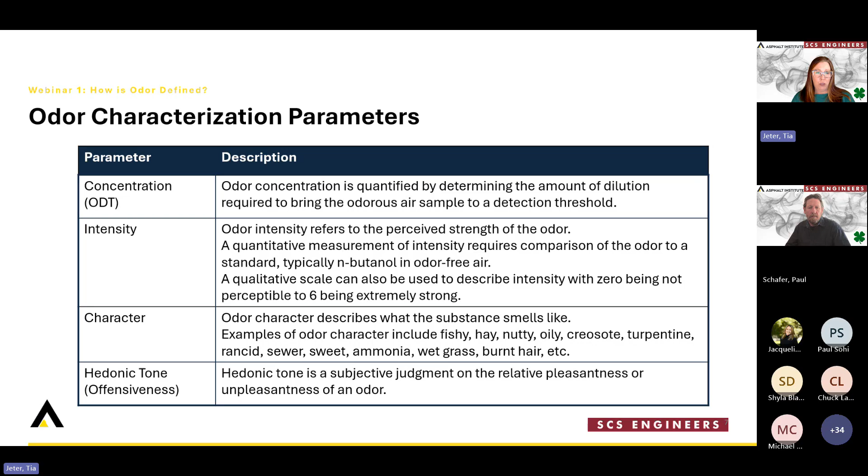Intensity refers to the perceived strength of the odor, another way to characterize it. The character is a definition of what does it actually smell like? Does it smell sweet? Does it smell fishy, nutty? There are ways to describe an odor, and that is considered the odor character. And then the hedonic tone is the perceived pleasantness or unpleasantness of an odor. So those are the characteristics we use to try to define what odor is.

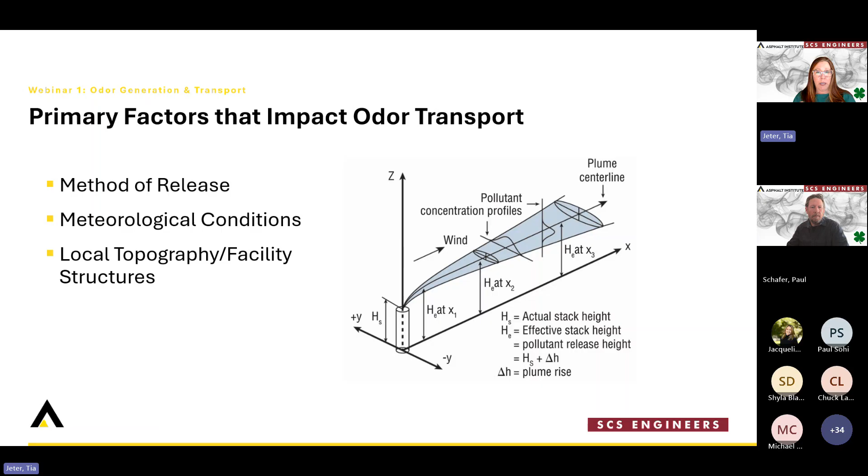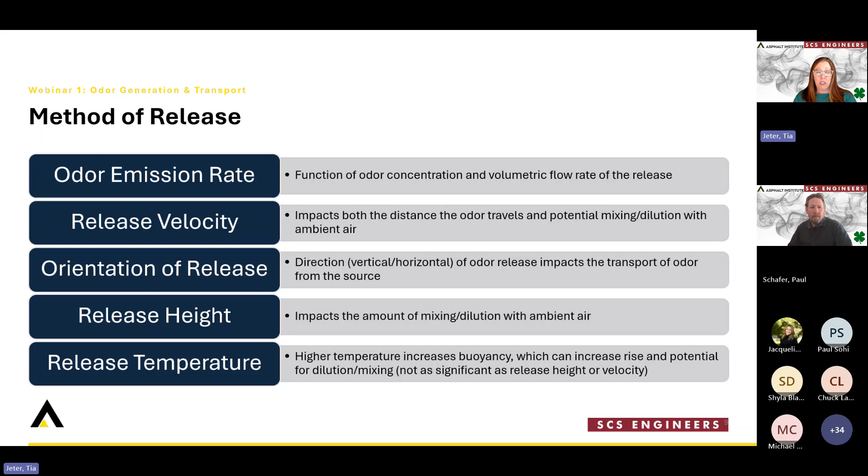The primary factors that impact odor transport are the method of release of the odor from your facility, the meteorological conditions at the time of the release, and the local topography and facility structures, which can impact how the odor will move. A little more detail on that method of release. These are the parameters for the odor emission rate of a particular source, a function of the concentration of the source and the volumetric flow rate of the release. The release velocity, which can impact the mixing and dilution of the odor in the ambient air, the orientation of the release, whether vertical or horizontal, the release height, and the release temperature. These all impact how it will transport from a facility.

So that was a real quick recap of what we touched on in webinar 1. The next section is our odor monitoring options, and I'm going to hand that off to Paul to discuss.

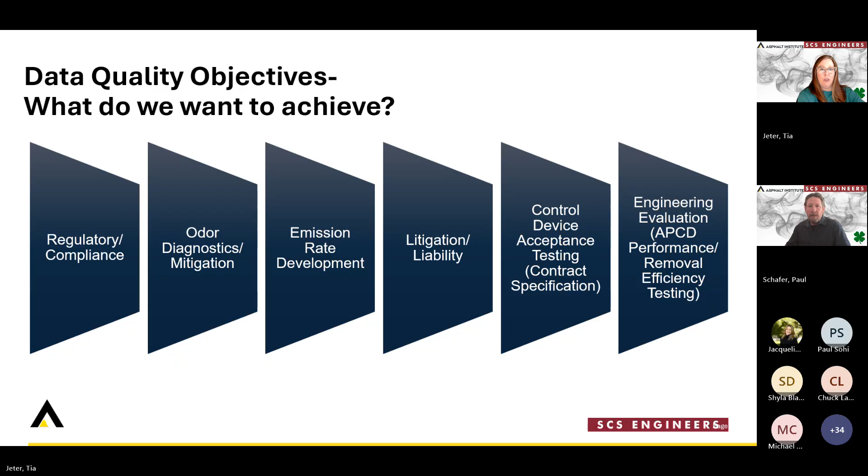So methods to assess odor concentration. There's a few ways we can do it, either through odor analysis, and we'll go into much greater detail on what that looks like later throughout this section, using odor panels, and that's where you collect a sample and send it to a lab for analysis, or field olfactometry measurements, i.e. using a Nasal Ranger or an SS100 type of field olfactometer. That's for direct measurement of dilution to threshold concentration of odor, just using the human nose.

Or there's other ways: you can measure specific compounds if you are trying to figure out what odorants, what compounds are driving your odor situation at your facility. Measurement of specific compounds may be necessary. There's all sorts of types, from volatile organic compounds, different types of ammonias, amines, sulfur compounds. Sulfur compounds tend to have very low odor detection thresholds.

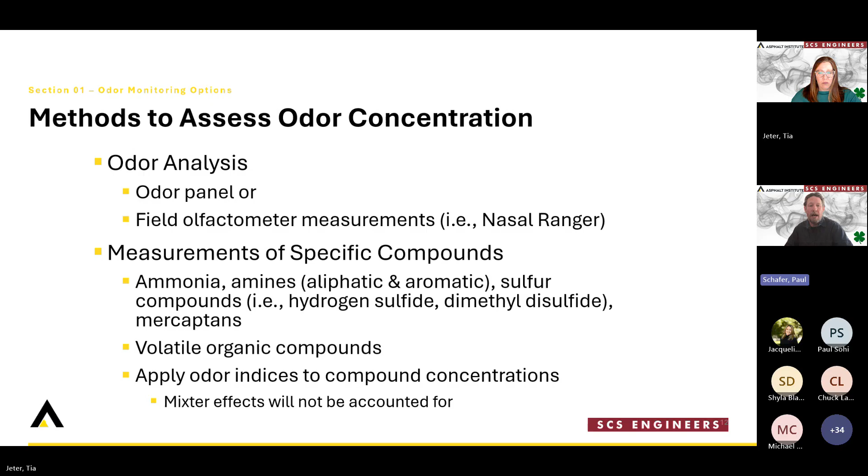And then when you're doing this, once you have the measurements made, you need to understand what odorant is related to that specific compound. Like Tia said, hydrogen sulfide has a very low odor detection threshold specific to that compound, but some compounds could have multiple orders of magnitude higher odor detection thresholds and might not be a main odorant, even though they're a high percentage of the composition of your odor samples.

So again, just more ways to gather measurements. For on-site odor measurement, field olfactometry is a great way of assessing. Nothing beats the human nose as far as the perception of odor. There's a thing called an electronic nose, and we'll talk a little bit more about that. There's certainly some limitations to the use of it. Real-time sensors, so the measurement of a compound that you know may be a significant odorant at your facility, real-time measurement of that as a surrogate for your odor concentration.

You may want to collect samples, and this all depends on the end use of your data, right? The type of data gathering measurements you're going to be using. For sample collection, you can use flux chambers. Those help you determine the flux of an odor through a specific surface area and are great for area sources. Direct probes, direct measurement, collecting lung samplers or Method 18 samples, which allow you to collect a sample without your sampling equipment coming in contact with the sample itself. Time average sampling, long-term time average sampling to get longer averaged measurements, might be necessary to meet detection threshold limitations.

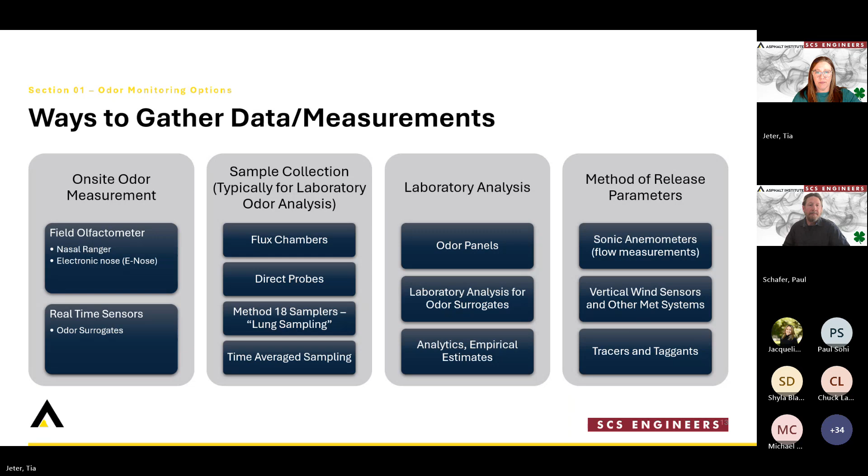So just some examples of field sampling methods. The ones listed here are kind of screening type methods for initial surveys. We have a Jerome sampler that is used for hydrogen sulfide sampling. It's capable of measurements down to the 3 parts per billion level, so just at the odor detection threshold or below it for most people. Field olfactometry using a Nasal Ranger. It's a system for determining dilution to threshold ratios using the human nose to develop an empirical measurement of human perception.

Other ways of on-site sampling: potentially colorimetric tubes to get just an idea of a range of a concentration potentially coming through a stack, other types of handheld meters, a Jerome, potentially a total VOC or PID meter to determine total VOC concentrations. And then essentially where you're collecting samples, often you need to know the air velocity at the time, because it's a significant variable in regards to odor concentration.

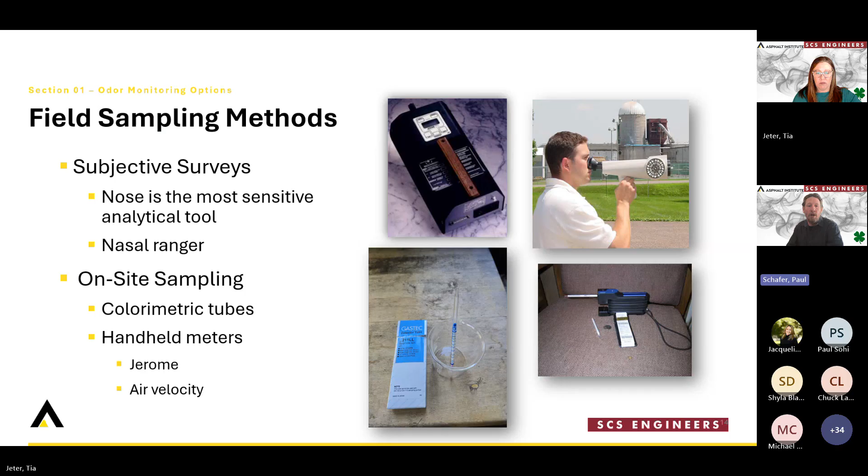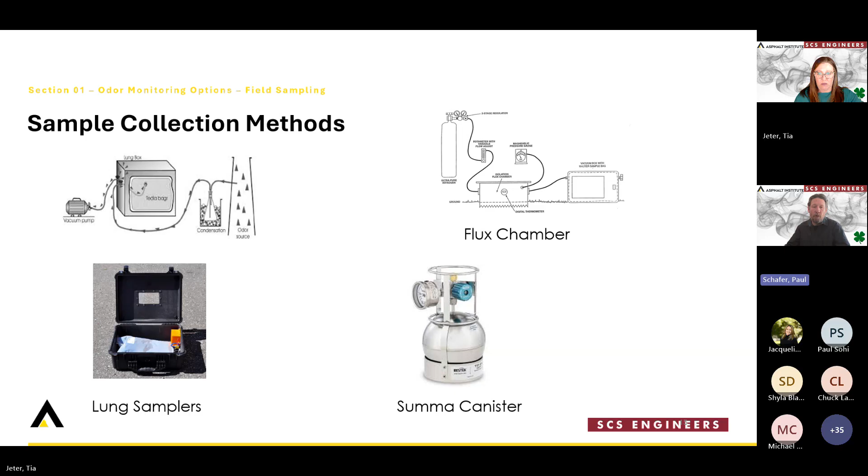Summa canister: it's a great method for collecting either time average samples with a critical orifice and flow controller, or you can collect grab samples with the Summa canister. It's considered a whole air sample because you can collect that sample and do multiple types of analysis on it, either for volatile organic compounds and a long list of those, or potentially a list of sulfur compounds. So multiple types of analytics can be performed off a single Summa canister, making it a really efficient way of collecting samples, either grab samples for instantaneous concentrations or time average samples.

It's just an example of a field deployment where lung samples are collected for subsequent analysis, either from stacks, process equipment, passive sources. When you're collecting these types of measurements, it's critical to also take velocity measurements or flow measurements so that you understand the volumetric flow of the specific source.

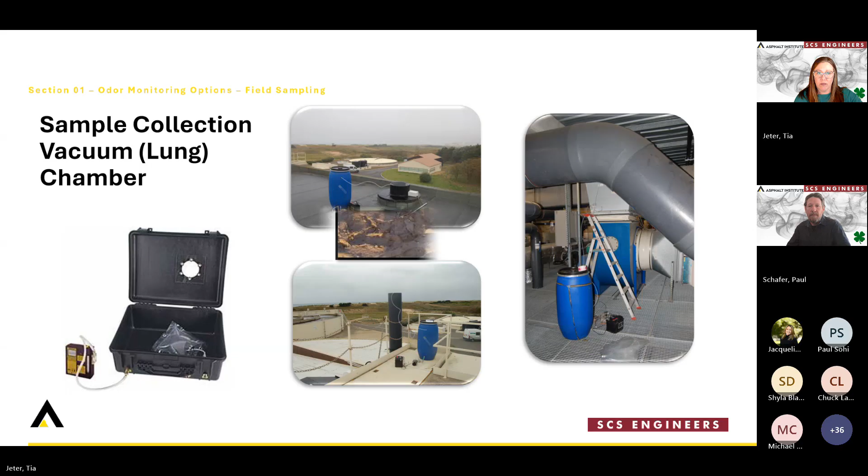Here's some examples of some dynamic flux chamber methods. Like I said, from collecting from area sources, you could actually collect them from liquid sources, as well as ground surface area or bulk storage areas. Sweep gas is used to facilitate the ability to calculate a flux of odor, a flux of a compound, as a function of the surface area that the flux chamber is situated over.

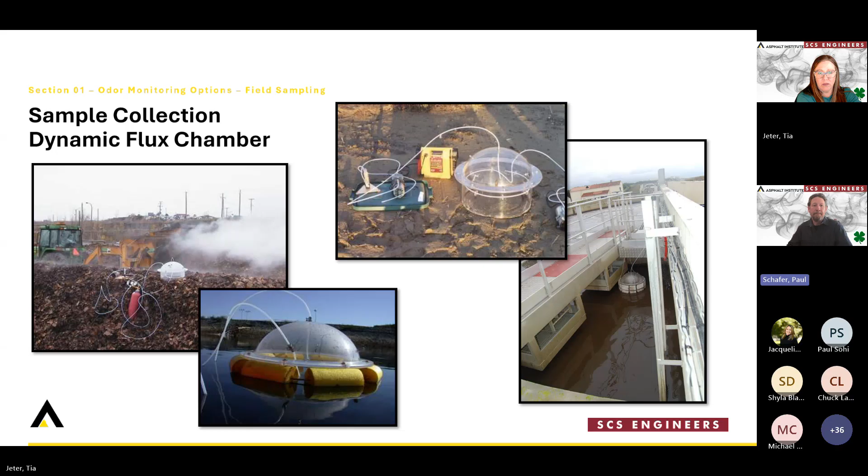So on-site measurements using Nasal Ranger. So this is based on the same principle of dilutions to threshold ratio, based on dilutions of sample required for the sniffer to detect odors. Generally, there's a wheel on there and you have preset dilutions you can set it to. For the Nasal Ranger, I believe it's 2, 4, 7, 15, and then it increases from there. Essentially, the larger number, the higher the dilution to threshold.

So background odors are generally between 2 and 7 D/T on a Nasal Ranger, and then you can get higher ranges for that, 30, 45. That's a very high concentration for an ambient measurement using the Nasal Ranger.

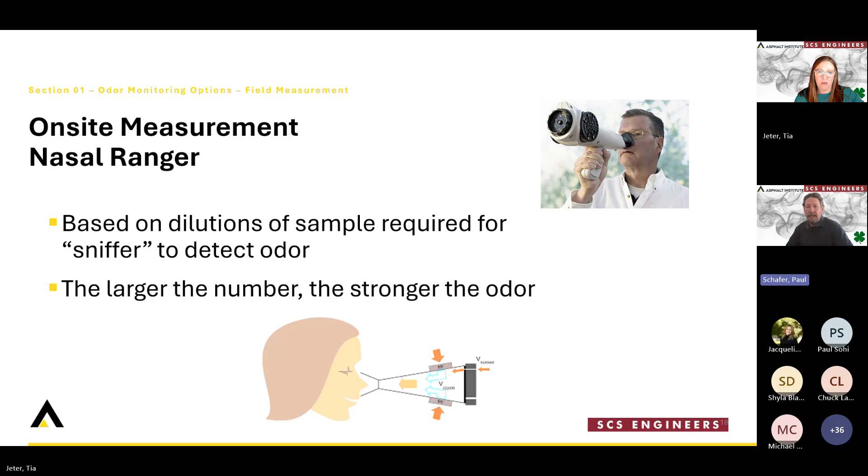So on-site measurement. So just briefly talk about electronic e-noses. I don't like the term e-noses because it tends to draw a strong correlation between a set of metal oxide sensors or electrochemical sensors that measure specific chemicals and an odor concentration. However, in most cases, odors are so complex. There's mixture effects. There's all sorts of things that go on. And after 25 years on the market and multiple different tools being developed, e-noses are still not very well correlated with human noses in most instances.

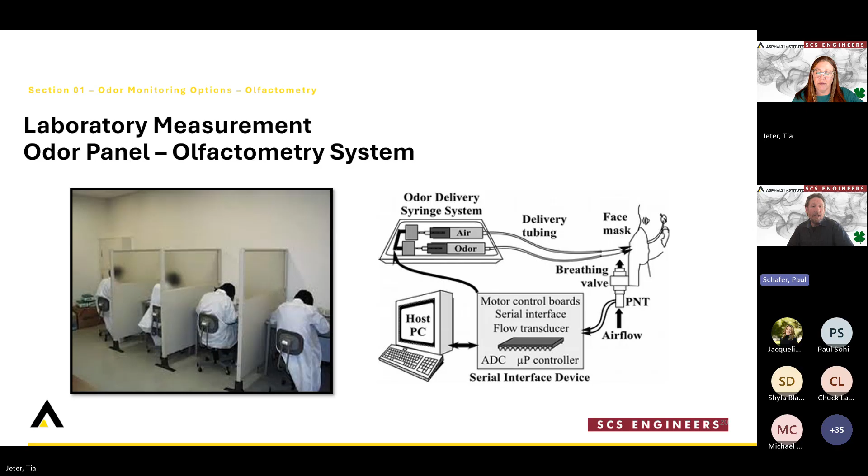So this is just a quick example of laboratory measurements using an odor panel. What happens here is you collect the sample in the field. The sample has to be delivered within 36 hours, and we'll discuss that a little bit more in a later section, and then it's analyzed at a lab. And the way this is done is you have certified sniffers. So you have people who have gone through screening to make sure that they are in the average range of smelling. You don't want what we call super sniffers, or people who are not able to detect compounds like the regular population. So there's a screening method that goes in there.

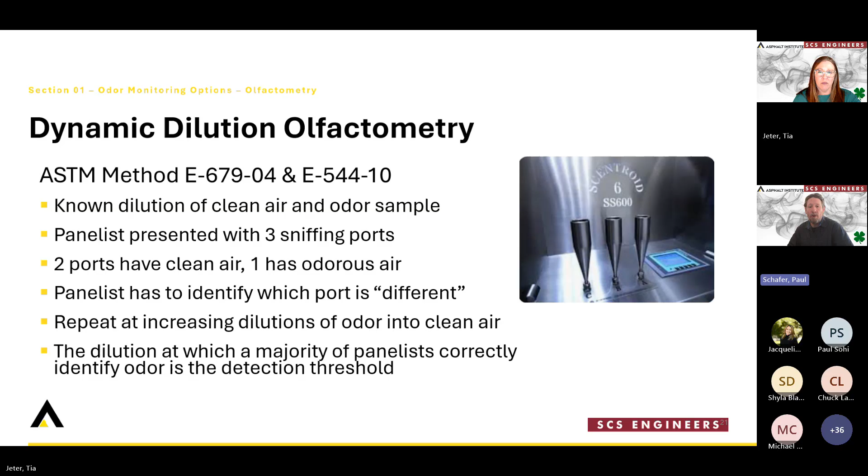So there's multiple panelists on it. Known dilution of clean air is provided to the 3 ports, with one of the ports having a diluted amount of the sample air. So 2 ports have clean, and one has odorous air at a dilution ratio. Panelists have to identify which port is different, and say, okay, port 2 has the odor, and you repeat this at increasing dilutions until a majority of the panelists correctly identify the odor from the specific nozzle. And essentially, the higher the odor detection threshold, or dilution to threshold concentration or odor units per meter cubed provided by the lab, the stinkier the sample is.

So why is olfactometry important? It helps the industry identify and assess the relative concentration of odors associated with its operations. Again, it provides empirical data to describe a human perception. And using multiple odor panelists, it's incredible how well this normalizes and works to rank odor sources and identify the odor strength of a source. It may be used for compliance. ASTM standards provide guidance for accurate and standardized odor assessment, so it's repeatable, and it could even be written into a regulatory requirement.

ASTM E679-04 is a standard practice for determining odor and taste thresholds using a forced choice ascending concentration series method, and it's the method that most odor labs utilize. There's also a European method utilized by some labs. So we just discussed a little bit about the importance of olfactometry, what it can do for you. There are some significant challenges to olfactometry, especially using odor panels.

The holding time. They have to be analyzed within 36 hours from sample collection to analysis. So that means you have to have the odor lab generally reserved ahead of time prior to collecting samples. You can't have an odor event, collect a sample, send it to the lab, and expect them to be ready to analyze it. It has to be forecasted and reserved with the odor lab.

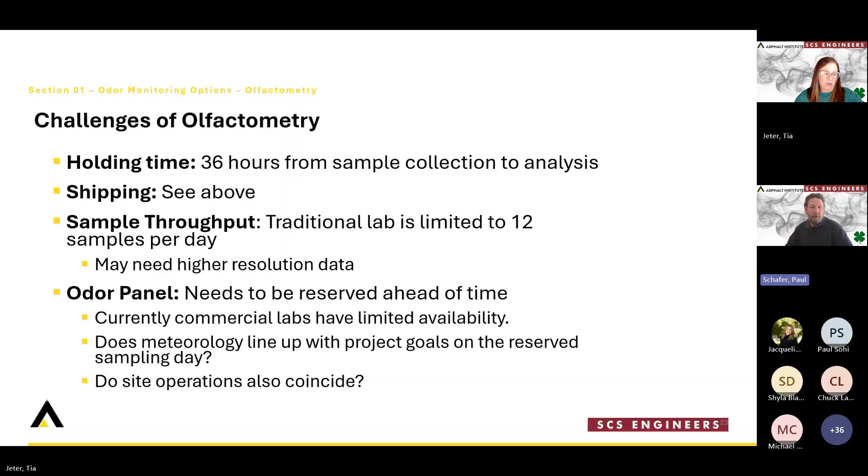All right. So now that Paul went through how you collect a sample, I'm going to do just a quick overview on how to complete an odor assessment. When you start an odor assessment, what we suggest initially is to define your program goals and design features. Some of these are listed out here. You want to ask yourself, what is the end use of this data? What is the point of it? Is this for a regulatory issue, or is this just a proactive site wanting to get a sense of where you are today? So understanding what that is.

Looking at the odor causing processes and ensuring collection of representative samples. You don't want to take a sample during a malfunction or an abnormal operation and base your assessment on that, unless that's the case you're wanting to define. Understanding the air matrix or process stream composition you may encounter, and from that you may be able to select some target parameters, and also be mindful of potential interferences because of those compounds being together. You also want to look at precision and accuracy goals, including detection limit requirements. This may require collection of a sample over a longer period so your detection limits are met.

From all of this, you can identify the methods that will fit based upon those parameters, and then see how all this affects your budget and resources. Do you have enough budget to do the full scale of an assessment? And if not, where do you need to pull back on your approach? And then also considering your stakeholder expectations and what they want out of your program.

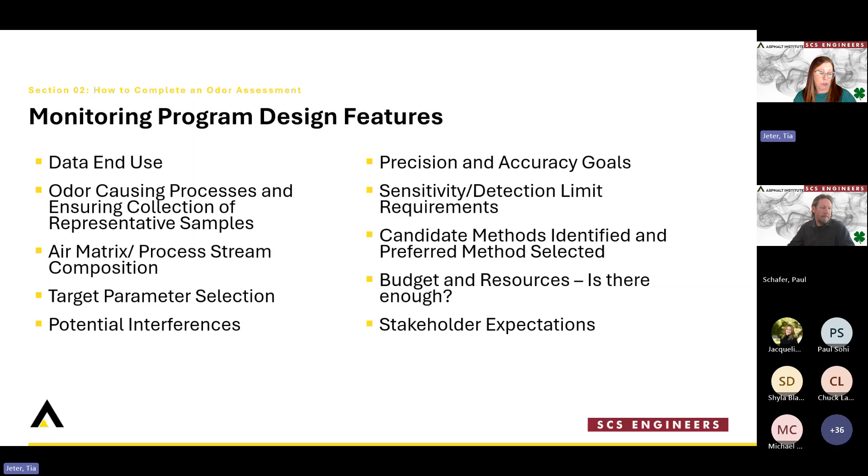Something we also suggest is preparing a roadmap at the beginning of this process, once you go through that planning for your monitoring program. This will document your program elements for all stakeholders involved. This is really valuable, especially if you have community involvement in an odor issue where they want to feel like they are part of the process. It just helps with that community involvement. We also see this required, especially when these studies are done because of a regulatory compliance issue or litigation.

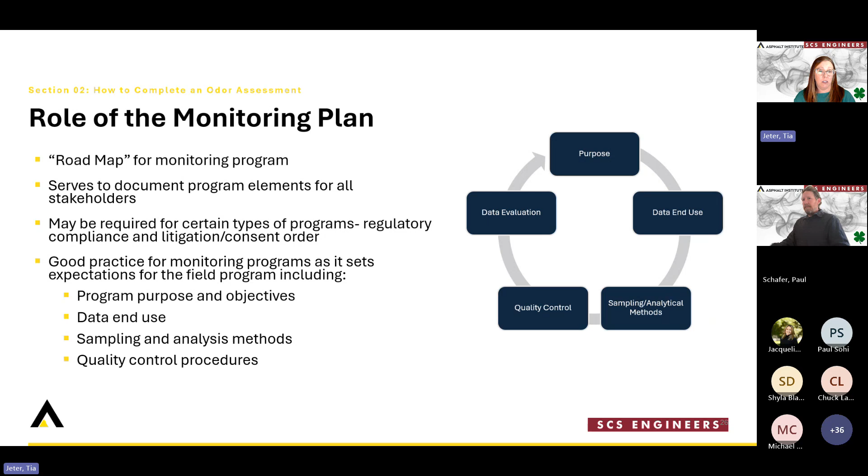Coming up with a monitoring plan is very beneficial. It'll help set the expectations for your field program. In these plans, you will set out the purpose and objectives of your assessment, the data end use, sampling and analysis methods, and then your quality control procedures.

So the volume of your release, your volumetric flow rate, your stack parameters, temperature, release height, all that good stuff. And then from that, you build an odor emissions profile. That information is used with some meteorology. So if you're lucky enough to have your own met station on site, that's fantastic. We can use that data. If not, you can get meteorology from a local weather station. A lot of times these will be at airports close to facilities where we could find that data.

And from that, we will use a dispersion model to estimate downwind odor impacts from your facility. And then that model can be used to come up with mitigation strategies. So you can model different scenarios to see what kind of options you have to reduce odor.

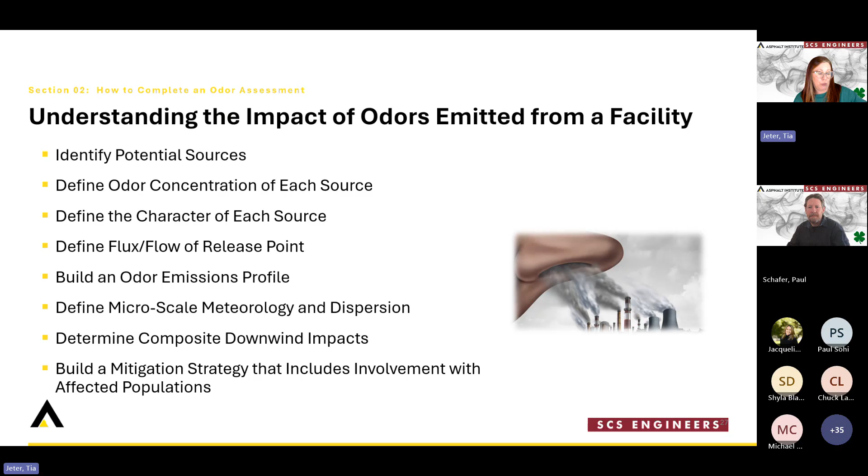So to build your odor source profile, by source, the first thing you're going to do is define the odor concentration. That's that D over T. So this is typically where you're going to go out, collect a sample, send it off to an odor lab and get that olfactometry analysis done to get your odor concentration. The odor lab will also typically give you the character of the source. So they'll define the odor, whether it's fishy, salty, sweet. You'll get that as part of that lab analysis.

That can be used to help determine, if you're having offsite odor issues, whether what people are observing downwind is consistent with the character defined by the lab. You also need to measure the source's volume flow. So those release parameters need to be collected as part of building this odor source profile. Something else we want to look at is the operation of that source. Is this a source that runs 24 hours a day? Or is it an intermittent source?

Like if you're unloading asphalt trucks, you're probably going to get a peak amount of odor for maybe 15 minutes or so when they're unloading that truck until the next truck comes through. So it may not be a continuous source, and we need to understand how that works, as well as any other operational scenarios. You could have a facility that changes the product line. So do odors change by product line you're making? You need to catch all of those potential scenarios so you model a full odor profile from your source.

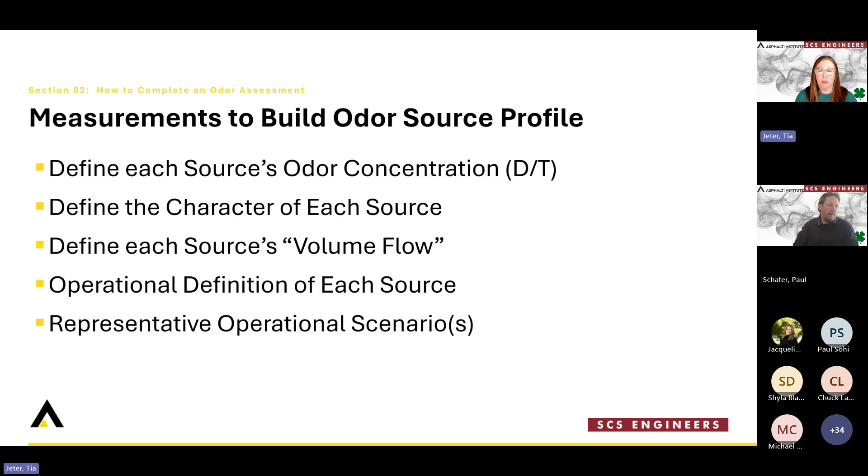With that, we can model your source. So the model inputs that we use in a dispersion model are the odor profiles for each source. So you have your concentration and all your release parameters. Facility structures are added, surrounding topography, and then local meteorological data. All of that goes into a dispersion model. And the model will predict ground level odor impacts surrounding your facility.

Typically, we do this with AERMOD. AERMOD is an EPA accepted dispersion model, which is frequently used for modeling of other criteria air pollutants for air permit purposes, but it also can do odor dispersion modeling. And with this AERMOD model, you can model many different scenarios to see how it impacts the expected downwind odor from your facility.

Like I said, with the model, you model different scenarios, and from that you can develop a mitigation strategy. So some of the strategies we've seen facilities make is just a change to facility operations. Time of day impacts can be useful, in that downwind odor is a lot of times stronger when you have a stable atmosphere.

A lot of times that happens in the early morning hours due to changes in temperature from nighttime to morning time. That's when it's very stable. There's low wind, low mixing. So you may have stronger odors occur in those morning hours.

So an option is, can we maybe avoid doing odorous activities those times of day and wait to do them later on in the day when we have more potential for mixing and dilution of odors? So those are just easy operational changes.

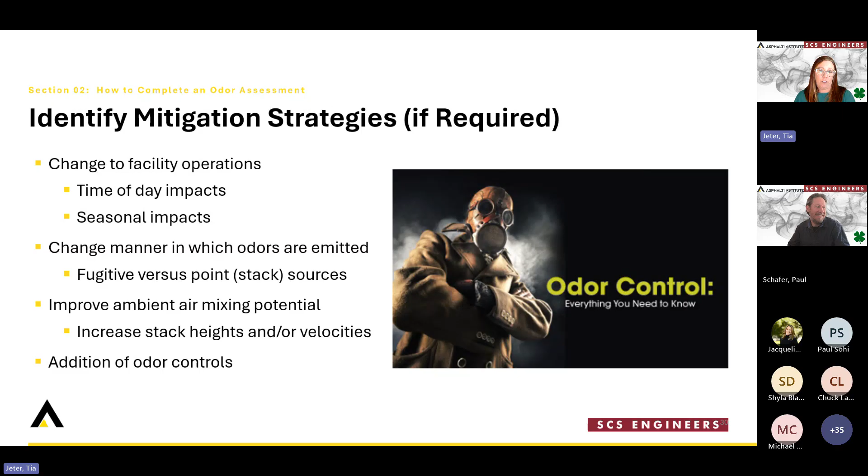Other ways that we've looked at to improve mixing would be increased stack heights or velocities. And then the last hierarchy would be to add those odor controls. That would probably be the most expensive option. So we start from the easy facility changes and then look at odor control towards the end. All of these are scenarios you can put in a model and see what that looks like to help a facility identify, from a suite of options, which one works best for them.

Some key understandings and mistakes to think about when you're doing these odor assessments: planning is one. Plan ahead and understand your limitations and constraints of your study. Make sure we're keeping in mind those operational considerations. So operating schedules, loading and unloading times, seasonal variations, those are all things that need to be defined and understood in your plan.

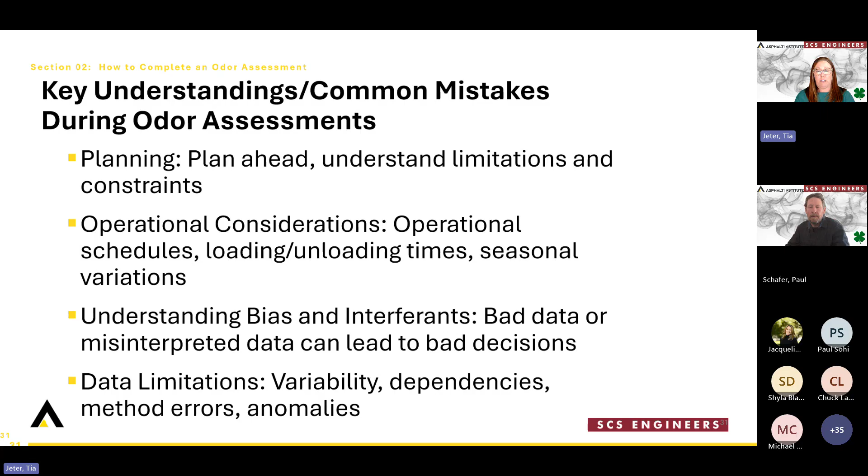Also understanding the potential for bias or interferants. Bad data in can be bad decisions out. So you want to make sure that the data you're looking at is appropriate and there isn't any potential for misinterpretation. And then also just data limitations. If there's variability in data, dependencies that aren't considered, method errors in your analytics, those are things that again can lead to that bad data. So just think about that as you're going through your odor assessment and make sure you're understanding all those risks.

So that was a very quick discussion on how to do an odor assessment. This next section, we're just going to go over a couple case studies on odor assessments that we've done to give you a flavor of what those have looked like.

This first case study, this was actually some odor work we did for an asphalt shingle manufacturing facility. This was a proactive decision by this facility just to gauge where their current state was and if there was any room for improvement on potential odor reduction at the facility. So we did build an odor profile for the plant. We started this from the desktop assessment of identifying all those potential sources. From that initial assessment, we decided these are the biggest bang for our buck. We're going to go ahead and collect samples from those sources.

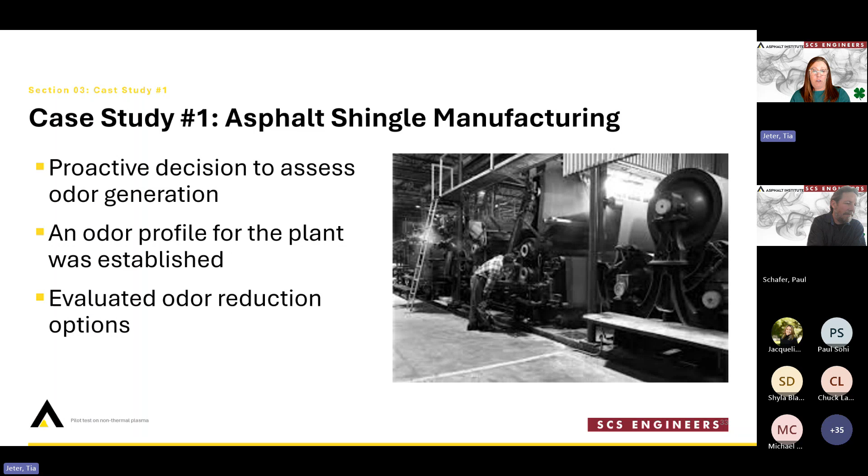While we were on site, we did measurements for all those release parameters for those sources. So we did all the stack information. We did measurements of fugitive sources. That way we could take all that data, put it into a model of the plant, and then from that help them identify potential odor reduction options that they could pick from.

So it shows you that in certain circumstances, you could have an odor source with a very high concentration, but if the volumetric flow rate is low, your odor flux, or the mass, if you were to try to convert it from a concentration to a mass of odor leaving your facility, is low, which is why it's important when you're trying to build your odor assessment, you look at both. It's not just concentration. You have to understand how it's released and at what volume it's released from your facility.

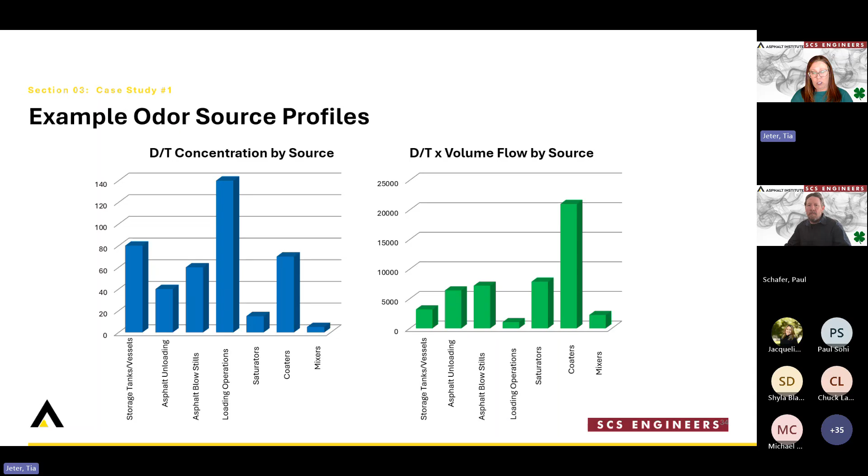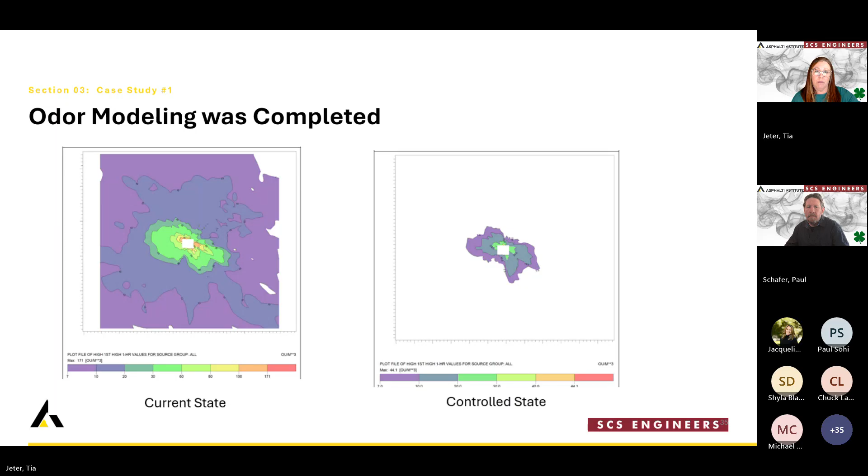In general, with the odor mitigation plan that was developed as part of the testing on site, we were also looking to see if there was an odor surrogate we could use moving forward, so that we could just sample for one parameter in lieu of doing a full odor panel, to help avoid some of the issues with olfactometry. With that, we did analysis for total sulfur in conjunction with collecting odor samples to see if there was a relationship.

So in this case, for the facility, increasing some stack heights can be a slight initial capital, but it's not super expensive. That can make really good improvements to odor. And then they are also going to be potentially installing some odor control just to see what impact they get from that.

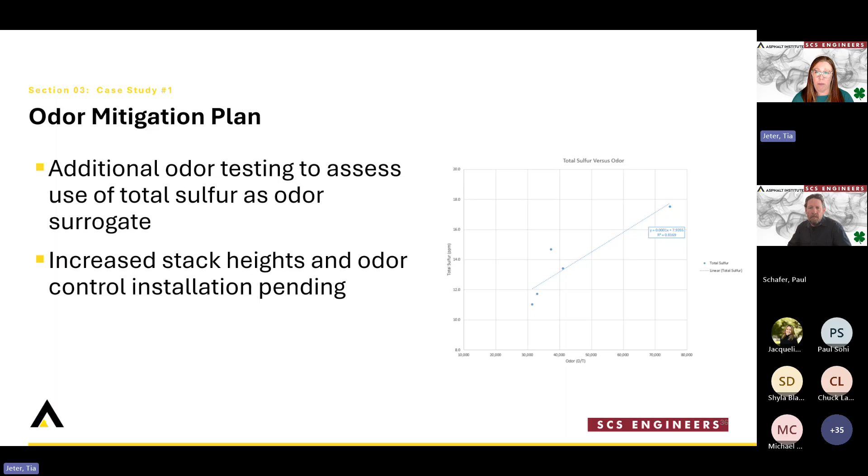This next case study is one that Paul worked on, so I will hand it back over to him. Thank you, Tia. Appreciate it.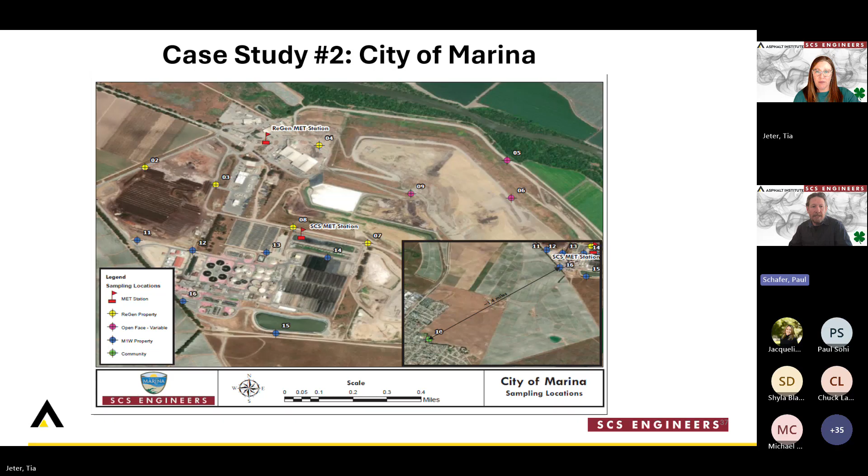There's also an active landfill with an open face, a construction and demolition debris processing area, a gas to energy plant, so all sorts of different sources in one area. So the way we structured this project is to try to bracket each of these sources and subsources with a collection of a sample, upwind and downwind, from a specific source or subsource. So if you move on to the next slides, we had samples that were collected on site, samples collected off site, and roving samples.

One thing about this project, and I think it's important, is that because this project was so complicated, each of the sources believed that the other source was the cause of the downwind impacts, and there was a lot of finger pointing going in opposite directions. There were a lot of people involved, from the community, the city, the specific sources being assessed, and then SCS, who conducted the measurements and performed the assessment. And we got feedback from each of these groups prior to moving through the project to make sure that the data we attained met the project goals.

So for the project plan, task 1 was the initial review of information. We wanted to review complaint data and meteorological data associated with that complaint data, seasonal wind variations according to the meteorological analysis, report those findings, and then we updated the overall project plan based on the available information we had at the time. We determined that there were specific seasons and times of day that were conducive to odor impacts into the communities. So we decided to design our monitoring project around those same meteorological conditions.

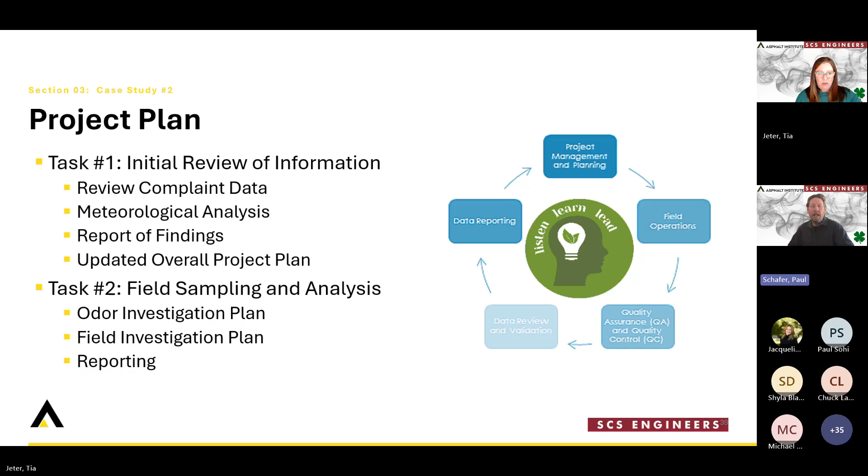So in our MET complaint data review, there were 60 MET stations in the region, but we've determined that only 3 were viable due to either data quality, the averaging times attained by that meteorological system, a lack of historical data being stored, the temporal resolution of that data. Like I said, its averaging periods weren't conducive, and what proximity they were to the city. In a highly topographic area, you need to have fairly close meteorological data to better describe the situation at your location.

ReGen is one of the odor sources, the landfill, and they had an on-site meteorological station, which ended up being perfect for the study, and another nearby station that we used to confirm the ReGen data was similar and representative. We've determined that easterly winds were prominent during the morning, but taper off in the afternoon. And those morning hours were what moved odors toward the city from east to west. The majority of complaints occurred during the winter months and during the morning and afternoon hours, with morning being the most prominent. Thus, we utilized those periods for collecting our field sampling.

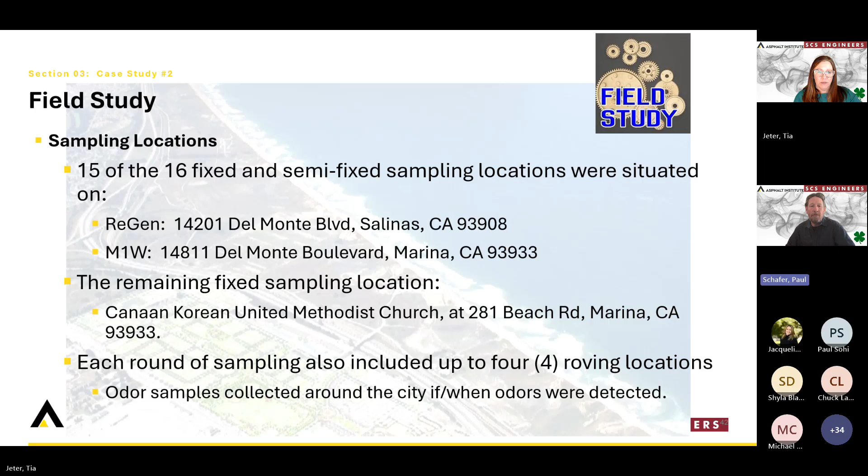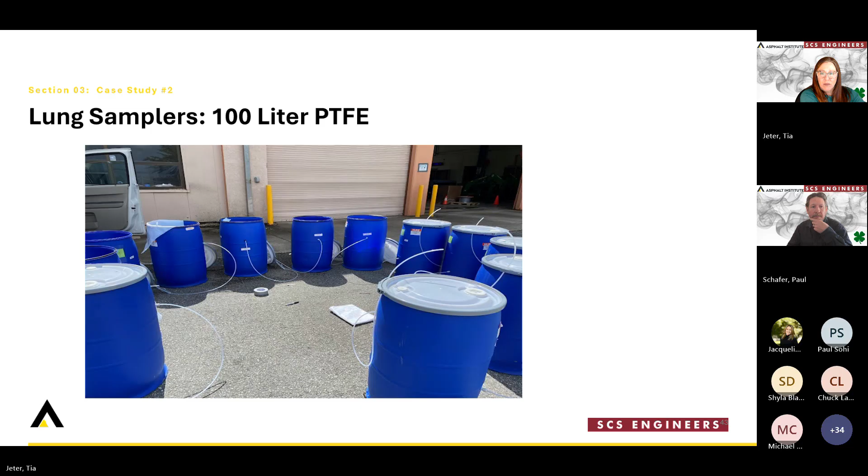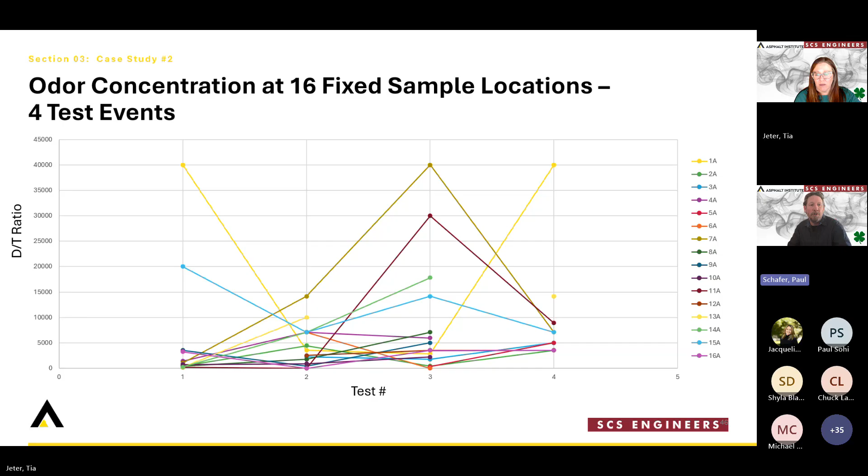And just so you know, we had 4 test events. The results of the 4 test events, the tests are on the bottom, show the relative concentration of odor specific to the 16 different fixed monitoring locations. We also incorporated our roving monitoring locations into the analysis. And it generated some pretty quality data that we were able to glean some conclusions from. And the following will be those conclusions.

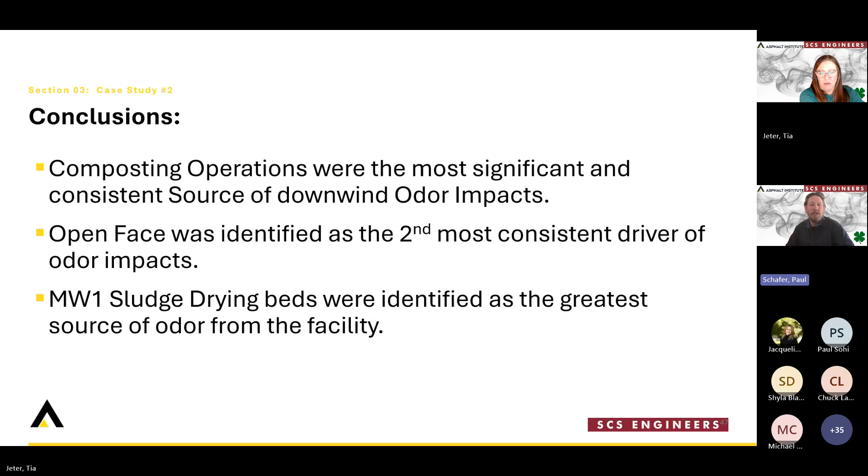So composting operations were by far the most significant and consistent source of the downwind odor impacts. And looking back, this was one of our hypotheses because they started integrating food waste into their compost facility, and odor complaints increased following that process decision. The open face of the landfill was identified as the second most consistent driver of odor impacts into the community. And in regards to the wastewater treatment plant, the sludge drying beds were identified as the greatest source of odor from that facility. So now that we have those conclusions, we were able to provide some recommendations to the specific sources and to the community and the city.

One of the recommendations was to clean out the ponds and sumps, specifically the pond associated with the compost operation that took that runoff from that. Use aeration as a subsequent measure to reduce odor impacts from that.

Understand how wind and met conditions affect odor. Identify the best and worst times to accept odorous loads or conduct activities that can cause odor. Adjust the timing of waste acceptance and disposal accordingly.

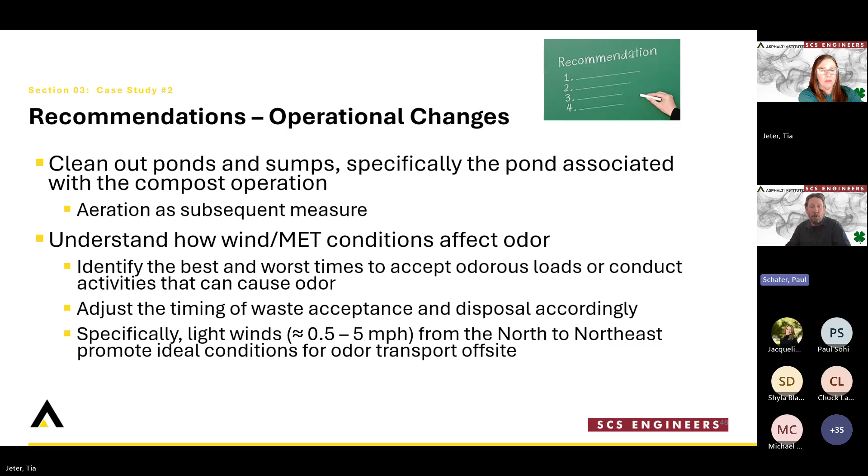Specifically, light winds from 0.5 to 5 miles per hour from the north to the northeast promote ideal conditions for odor transport offsite. If you can do anything to reduce or not perform site activities that you know are odorous during those specific meteorological conditions, it will help reduce your impacts.

So recommendations. So additional operational types of changes. Limit the time periods for stockpiling and processing odorous materials, especially food waste. Conduct compost pile turning during times of day and/or under weather conditions that will result in the least offsite odor impacts. That's higher wind speeds and potentially not in the direction of the community.

Use enhanced procedures for handling of odorous loads at the active face. You don't need to go into the details of that.

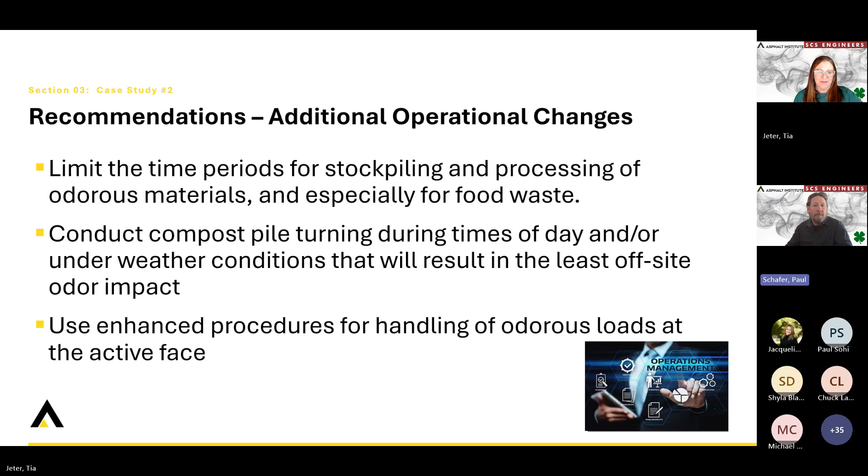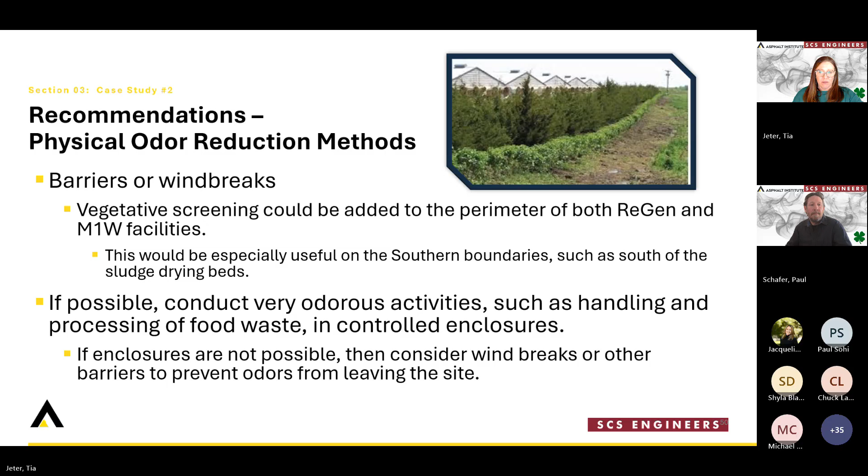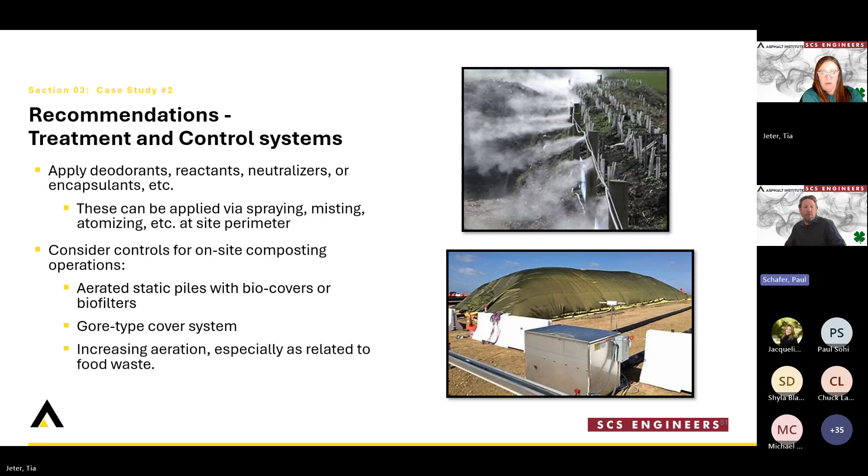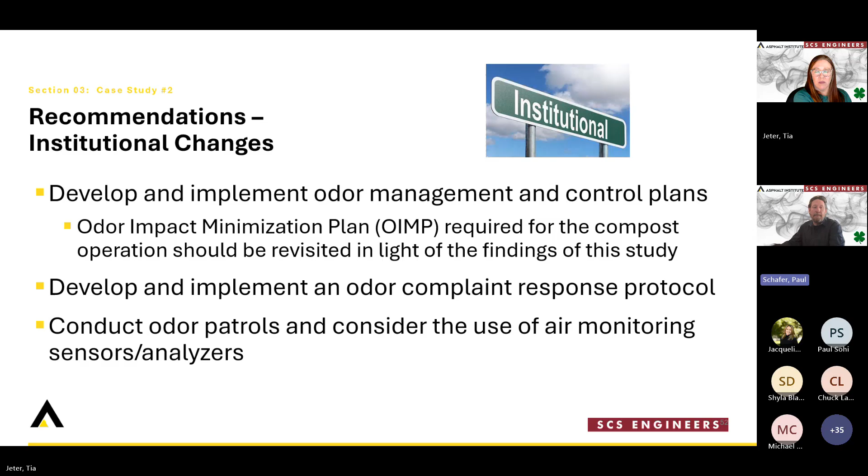So what's next? We have one more webinar of the three. We just listened to two. Webinar one was performed at an earlier date, and the QR code for that was provided earlier. Webinar three is going to cover odor control technologies, various different types, odor control plan development, community outreach and how that should be handled, and potentially some additional case studies.